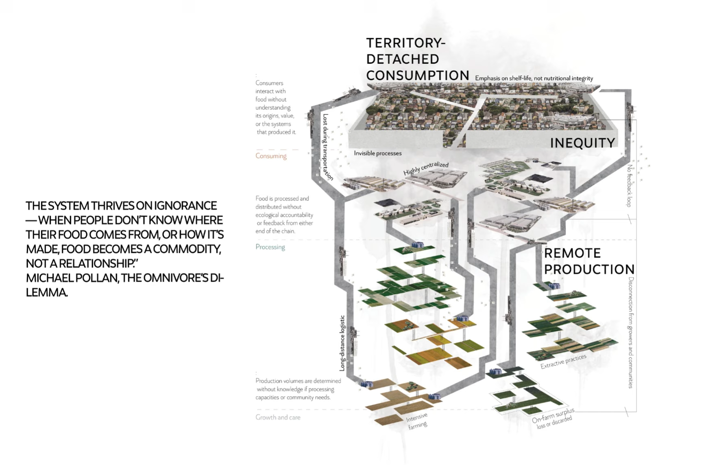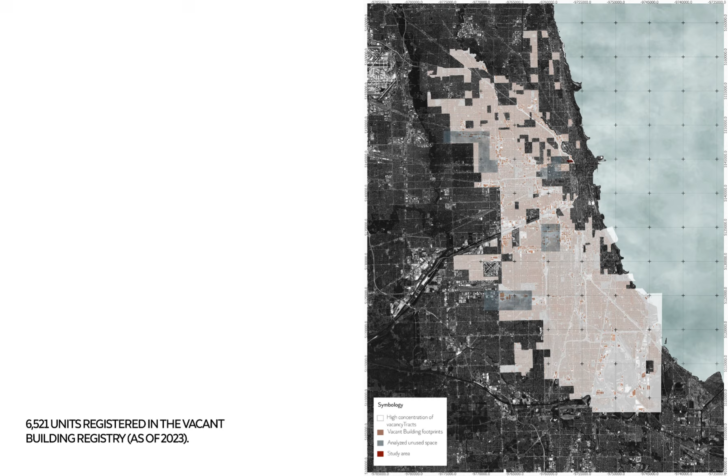Health problems in the US begin with a simple urgent truth: contemporary food systems operate through disconnection. In Chicago, the places where food is grown, processed, and consumed exist far apart, socially and spatially. This distance turns food into an invisible commodity and produces real health and spatial inequalities, where food deserts and food swamps coexist, alongside large pockets of vacant and underused land revealing a fragmented urban landscape.

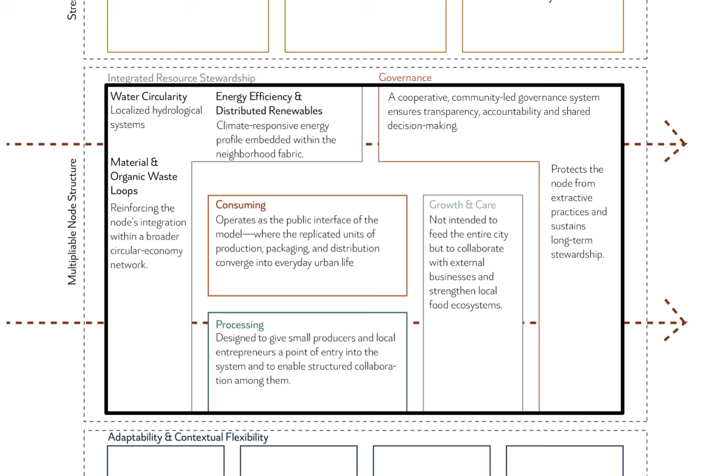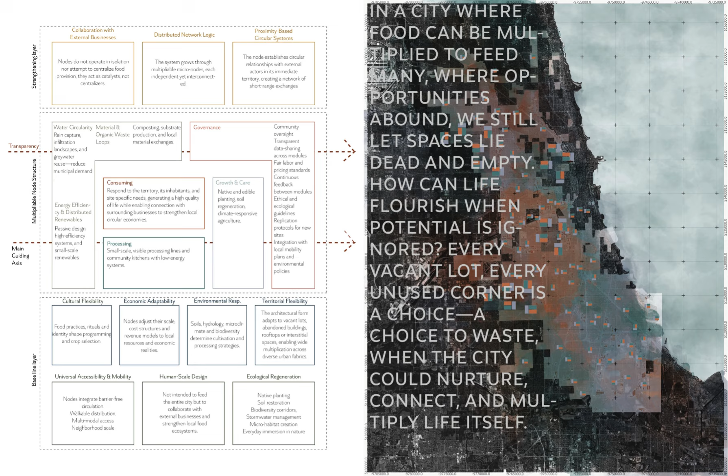Transparency guides how we reinterpret the stages of the food system: growth and care, processing and consuming, supported by two frameworks—a community-led governance model and an integrated resource stewardship system that aligns water circularity, renewable energy, and material loops. These principles form a replicable model for community-scale food systems, a framework capable of transforming vacant urban spaces into collaborative micronodes built on transparency, human-scale design, ecological regeneration, and distributed collaboration.

Guided by these principles, we now look directly at the site and its realities. At the block scale, we begin by reading the existing land uses, revealing a major gap: the block offers no access to fresh and nutritious food.

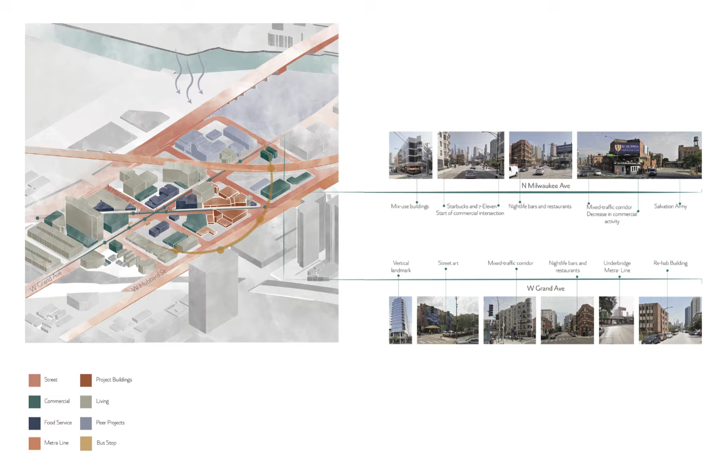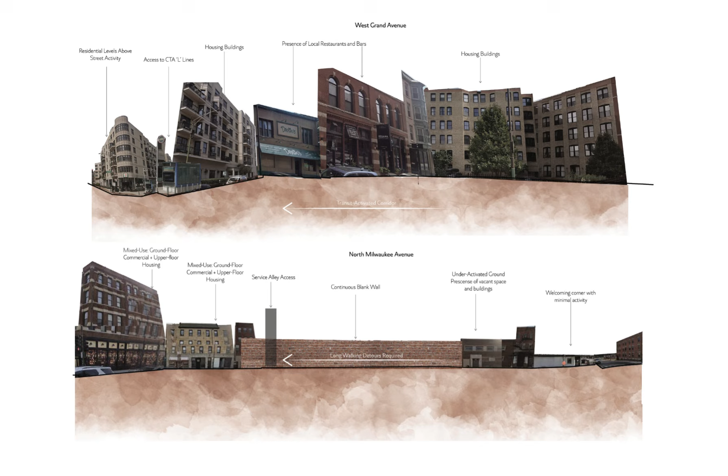Analyzing the two main corridors, both concentrate commercial intensity around transit nodes, but the spaces between them are underused, creating a fragmented urban experience. Grand Avenue is a transit-activated street with mixed uses and consistent street life. In contrast, Milwaukee has a continuous blank wall that creates an impenetrable edge, back lots, inactive frontage, and locked doors with no possibility of entering the block.

With that in mind, our first decision was whether to preserve or demolish. We chose demolition as the more responsible option, since the existing buildings couldn't grow vertically and retrofitting would be inefficient.

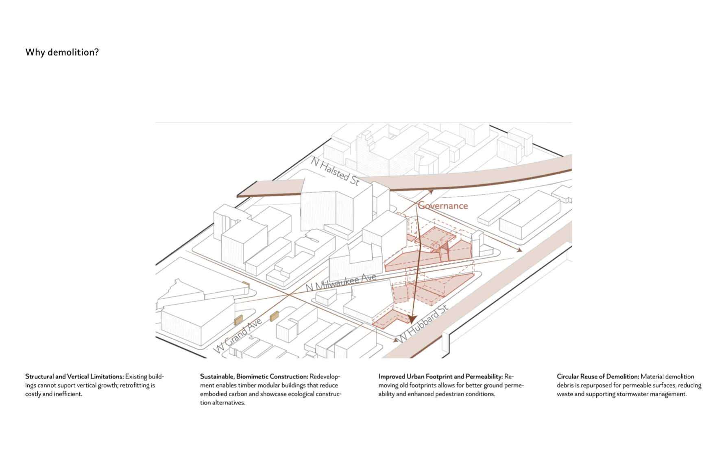From there, the form emerges through a sequence of moves: reconnecting the street as a pedestrian corridor, placing new volumes on the existing footprint, shaping an immersive topography guided by water, introducing public towers, and creating a protective canopy. Together, these moves reveal a larger truth—urban systems gain meaning at their points of intersection, where growth and care, processing and consumption converge along the diagonal.

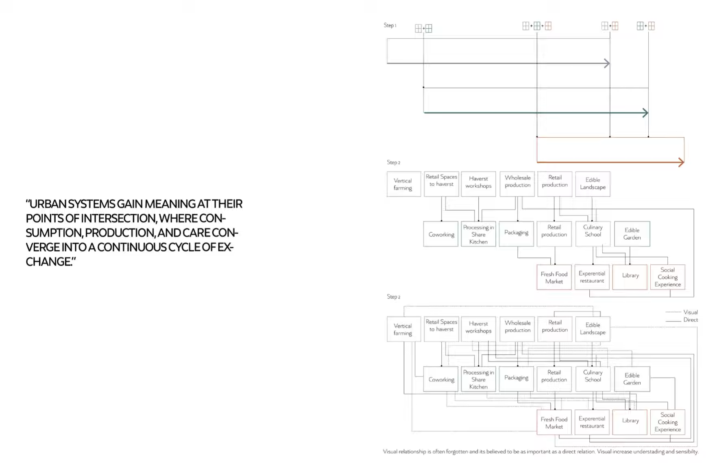In the master plan, the project starts to function as a continuous system. The program shows how growth and care, with vertical farming towers; processing, with a culinary school, green packaging, co-working, and shared kitchen; and consumption, with a zero-waste market and library, align along the diagonal as a sequence.

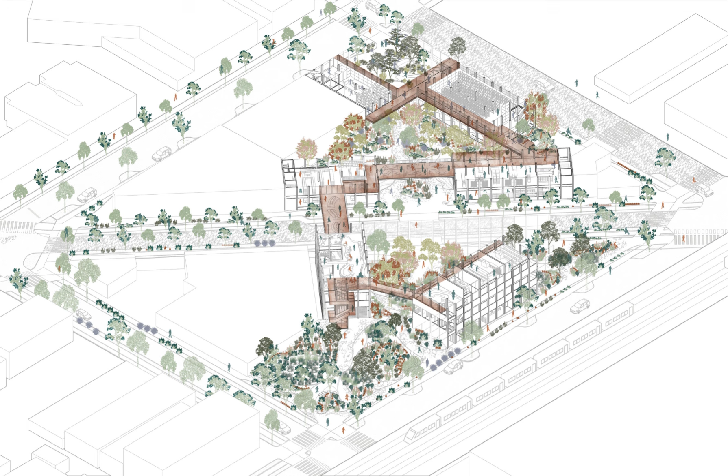On level 1, a public walkway stitches the entire block together through bridges and vertical cores. Anyone can move from the vertical farming tower to the library, passing through every stage of the food cycle. Along this elevated path, people don't just circulate, they see. The bridges become both a connector and a lens, revealing cultivation, packaging, cooking, and exchange, creating opportunities for people, activities, and knowledge to intersect.

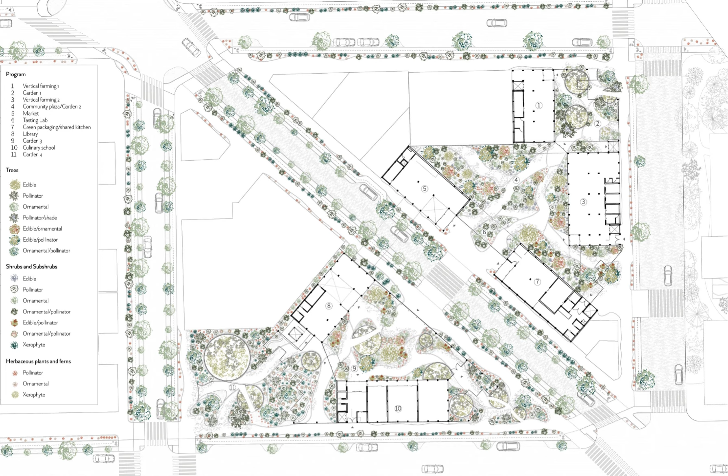Our environmental strategy creates an ecological gradient across the block, defined by the relationship between native and introduced species. Exterior gardens rely on native ecologies, while the ETFE-covered interiors allow introduced edible species to thrive year-round, remaining evergreen in winter.

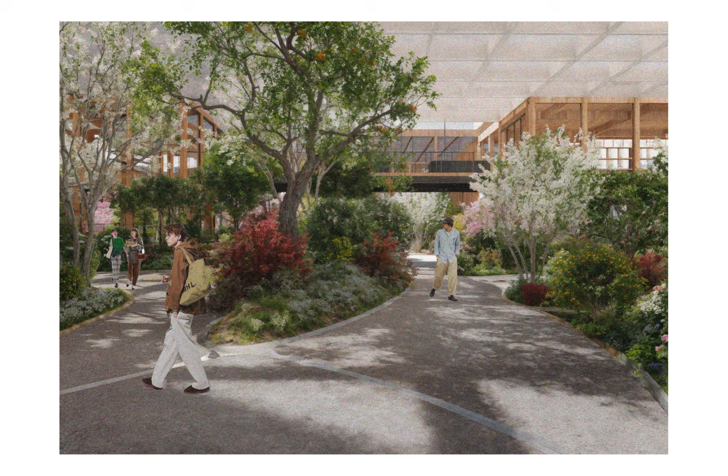Garden 1 is a cool native shade grove, Garden 2 forms a productive ETFE microclimate, Garden 3 becomes a tropicalized edible forest, and Garden 4 operates as a sun-exposed prairie. Together, these four gardens create a continuous sequence of microclimates, transforming ecology and human experience across the block.

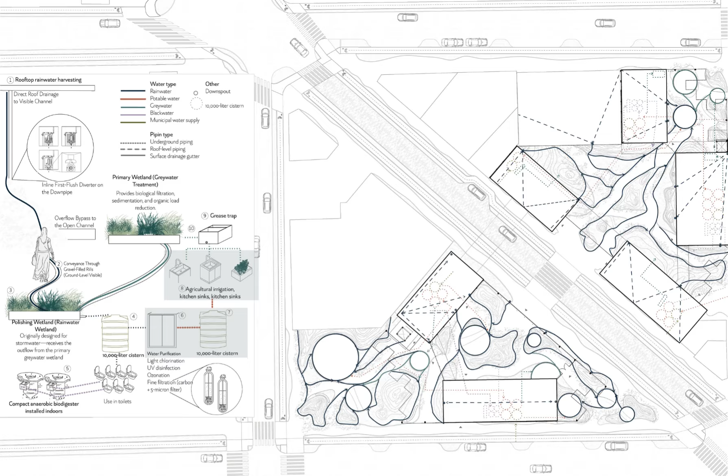Water operates through a semi-closed loop system. Rainwater is collected, filtered through visible gravel channels, and directed into the wetland, where it meets the greywater line. From there, it follows two paths: storage for toilets and the biodigester, or purification for irrigation and sinks. After passing through grease trap and greywater treatment, the clean water returns to the rainwater wetland, completing the cycle.

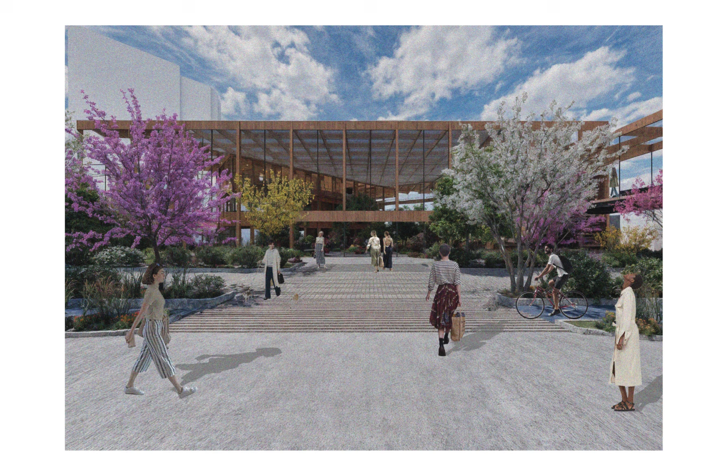At the urban scale, we structure the street within three layers: the pedestrian layer, which provides safe walking zones separated from cars and bicycles; the bike layer, protected by vegetation; and the street layer, treated as a traffic-calm zone, allowing drivers to experience the space more perceptibly, but more importantly, enabling pedestrians to move safely from one corner of the block to the other.

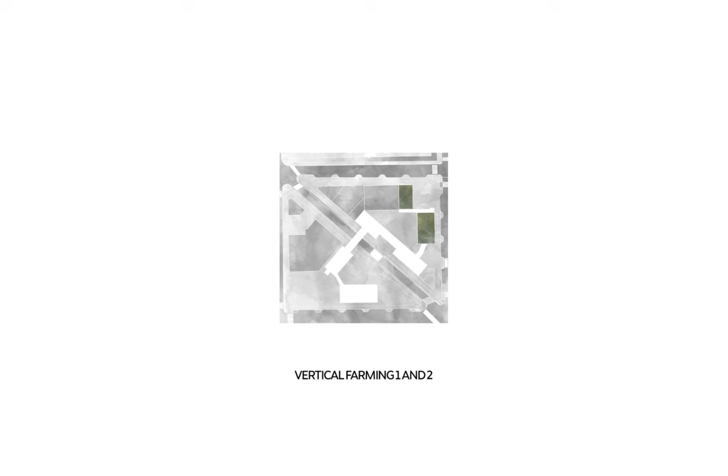The architectural project translates the entire system into six buildings that articulate the diagonal. We begin with vertical farming 1 and 2. Both begin with public access programs on their ground floors. Vertical farming 1 introduces visitors to planting and early cultivation, while vertical farming 2 hosts the co-working space as a networking hub where local producers can collaborate and build alliances.

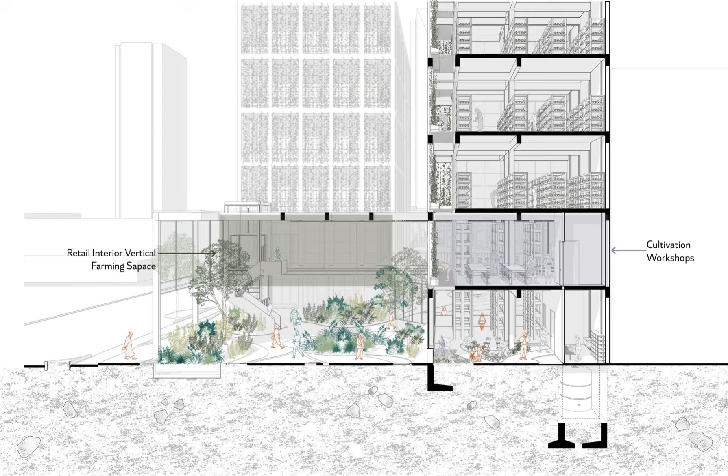On level 1, both towers continue this public condition. Vertical farming 1 with its cultivation workshops, and vertical farming 2 with a retail interior vertical farming space where producers manage their own small scale cultivation units and engage directly with the food cycle. As both buildings rise, they transition into the interior vertical farming core, while the exposed circulation and green facade make the productive interior legible across all levels.

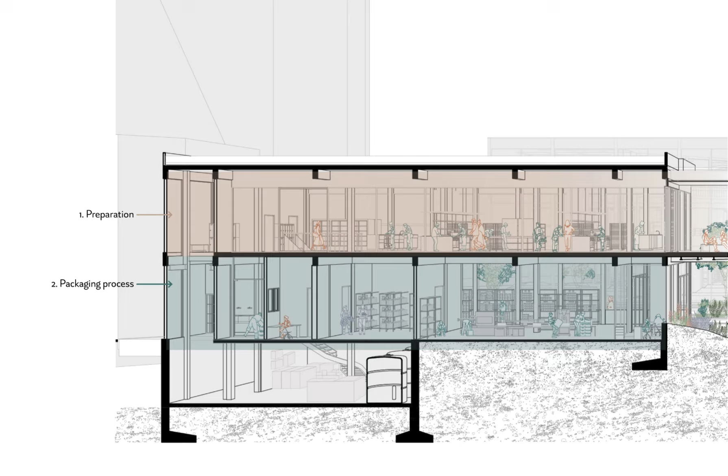Within the market framework, the green packaging and shared kitchen spaces function as a logical backbone of the block. All incoming products, whether grown on site or brought by local producers, enter through this space. In the shared kitchen, preparation and the green packaging items are cleaned, prepared, filled, sealed, and labeled through a sequence of specialized stations designed for circular handling.

Powders, grains, and delicate greens each follow a tailored path from cleaning and preparation to filling and sealing to branding and final output. Fresh greens are processed inside a cold storage air chamber, ensuring quality before packaging. The line remains transparent and visually accessible, allowing visitors to understand how materials move, transform, and re-enter the market.

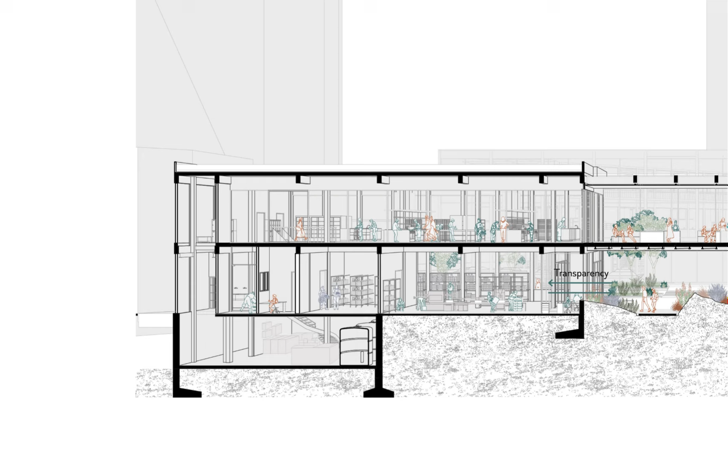Available for external users to rent, the space extends the project's utility, supporting small producers and community entrepreneurs, and even incorporating a collaborative layer where local artists contribute to labeling and visual identity.

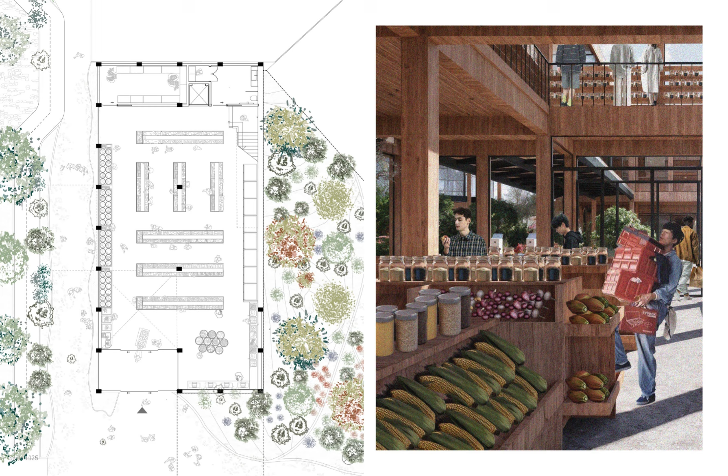The market becomes one of the central encounters of the project, the point where growth and care, processing and consumption overlap, an intersection of people, products, and practices. The furnishing works as an adaptable infrastructure that allows users to buy in bulk, weigh products on site, and take them home in a biodegradable or reusable material, embedding sustainable behaviors into the everyday act of purchasing food.

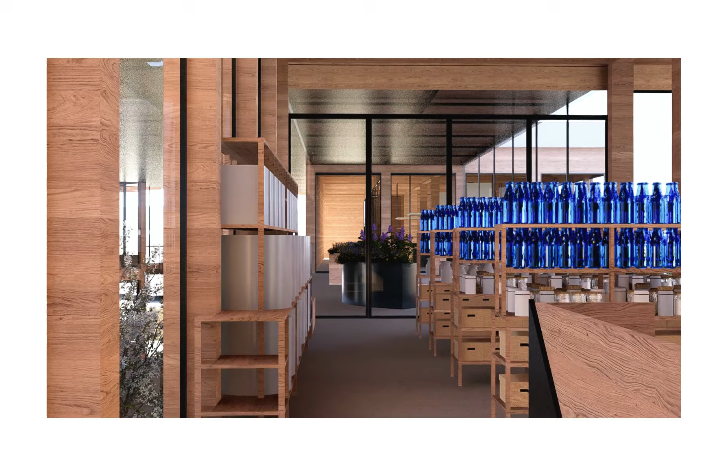The system is supported through collaboration between the vertical farming towers, the partners from the green packaging, the shared kitchen, and other local initiatives aligned with material circularity and responsible consumption.

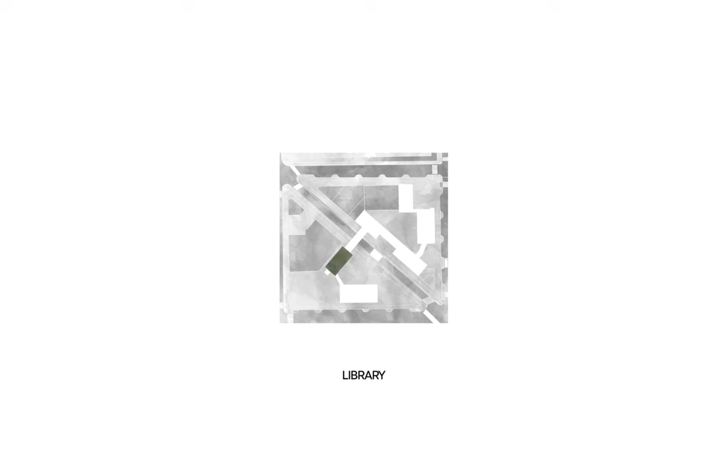Connected by a bridge that crosses Milwaukee Avenue from the market, the library stands at the end of the diagonal as a space of reflection, knowledge, and a different form of consumption.

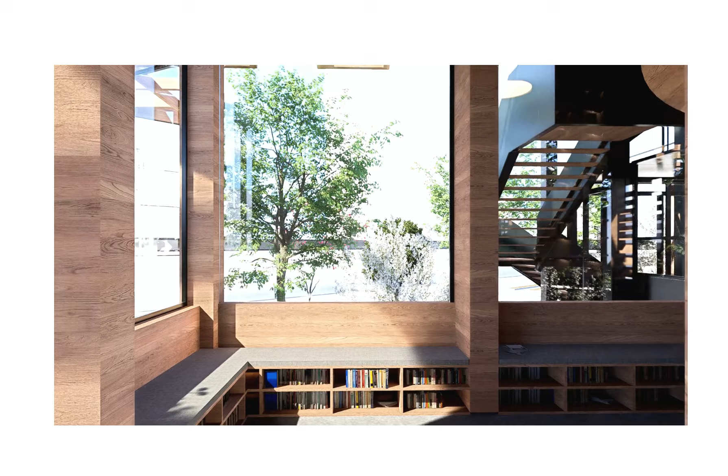The furniture acts as a generator of microspaces: cozy reading pods, adapting tables, benches, or dividers, maintaining a continuous material language. The rooftop extends the didactic experience into a restaurant operated by the culinary school, transforming the food cycle into culture, where people read, learn, taste, and connect.

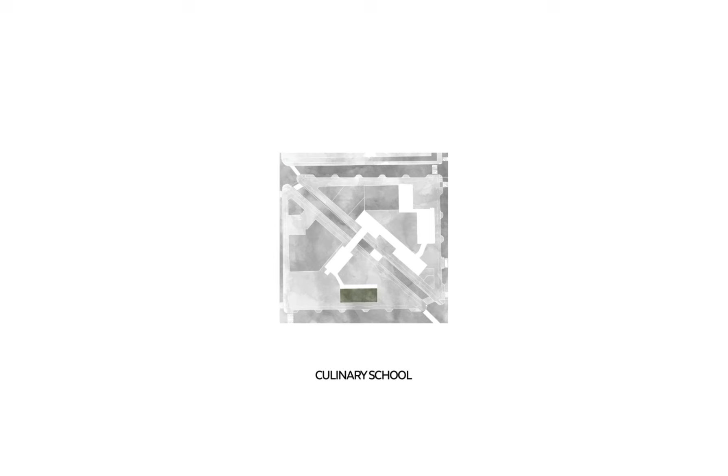Above, a multi-layer ETFE rooftop system works as a contemporary trombe-like assembly. The upper membrane modulates solar gain through control apertures, while the tension layer beneath stores and releases heat to stabilize the microclimate. Within the logic of multiplicability, only the growth and care stage remains constant across different sites.

Production and consumption adapt to the needs of each context. In our block, this led to the inclusion of a culinary school shaped by the artistic identity of the district and the idea of food as a craft.

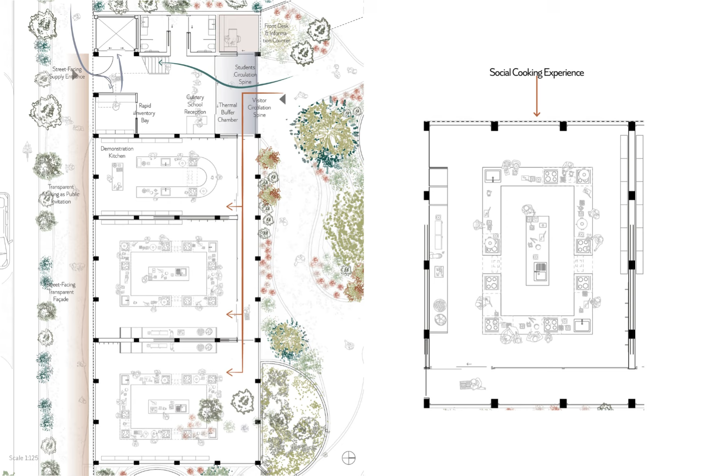Continuing along the walkway, the culinary school reveals the experiential side of food, and the ground floor social cooking experiences allow visitors to cook, eat, and interact in a shared environment, turning food preparation into a collective activity.

On level 1, the program introduces two distinct teaching typologies: a workshop counter designed for introductory classes and demonstrations, and a professional teaching kitchen equipped for more advanced instruction, specifically for culinary school students.